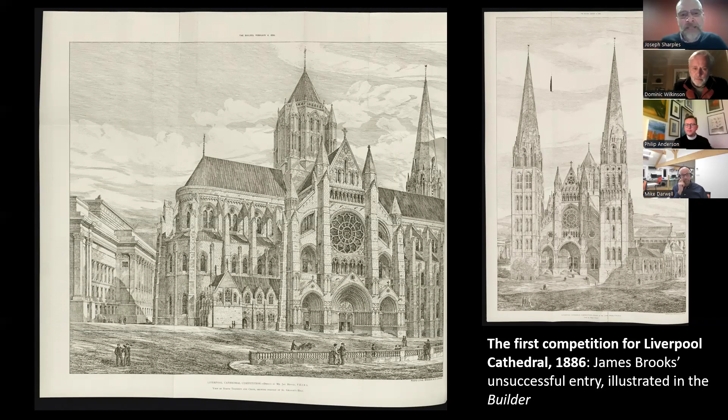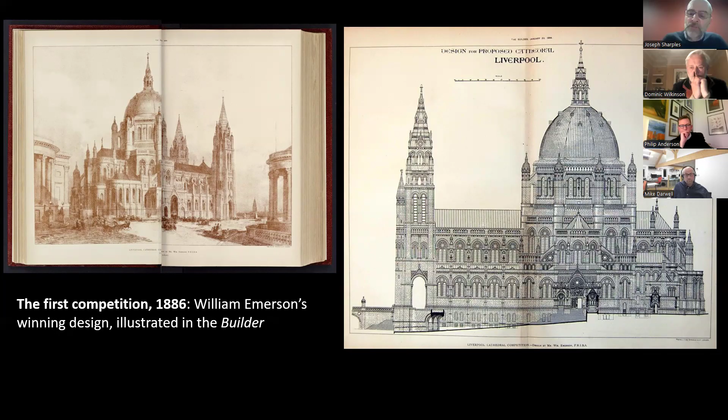There was a strong feeling also that classicism, the architecture derived from ancient Greece and Rome via Renaissance Italy, was a modern style appropriate for building in the 20th century. These two parties, the classicists and the modernists, were in conflict with the Gothicists. So there were exchanges of letters in the press objecting to the idea that the cathedral for Liverpool should be Gothic. So the Gothic requirement was withdrawn, but there was an unspoken belief on the part of competitors that Gothic would probably be favoured above other styles.

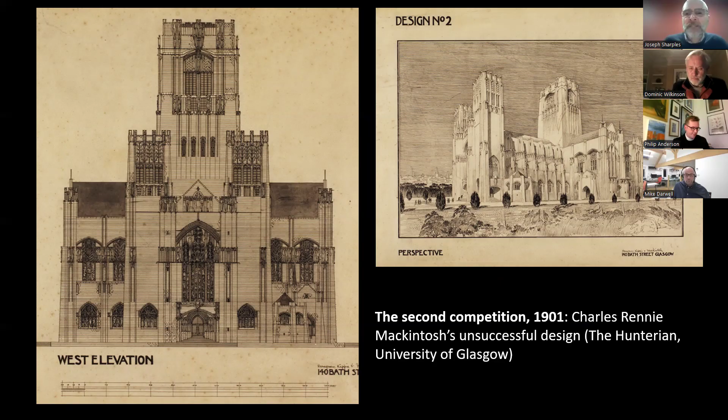There was a styleless design to be executed in concrete by the architect William Lethaby and some associates of his. There was a Byzantine design by the architect Beresford Pite. And there were these designs, which in my present job I'm interested in particularly, by Charles Rennie Mackintosh, the great Glasgow architect of the end of the 19th and beginning of the 20th centuries, in a sort of sinuous Glasgow Art Nouveau style. But none of these was successful.

Another difficulty was that, as well as being young and inexperienced, he was also a Roman Catholic. And in Liverpool, which was a very Protestant diocese, that was perceived as a disadvantage. And so the decision was taken to appoint as co-architect, alongside Giles Gilbert Scott, one of the two assessors for the competition, George Frederick Bodley.

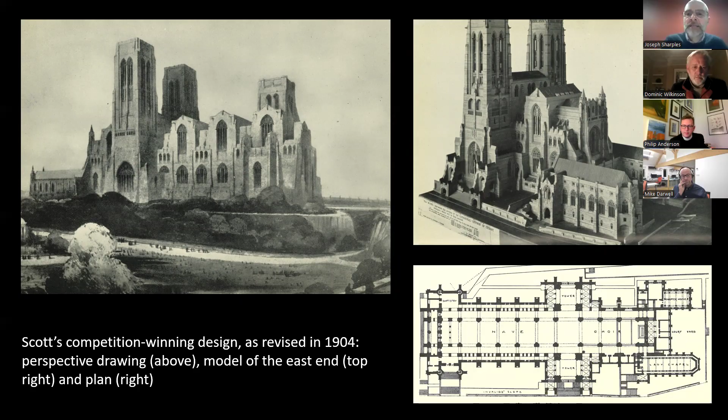Well, the earliest parts of the cathedral to be built were the Lady Chapel and the East End, which are shown in these 2 pictures. They're very different in character from the later phases of the cathedral, much more intricate, elaborate, with more sculptural decoration, more complex tracery in the windows, more numerous offsets to the buttresses that divide up the exterior of the Lady Chapel. And it's been speculated that these features might be due to Bodley's input as co-architect, but that's not at all clear from the documentary evidence. There were certainly struggles, tensions between Bodley and Scott, but it's not clear that Bodley dominated the design to the extent of determining these features.

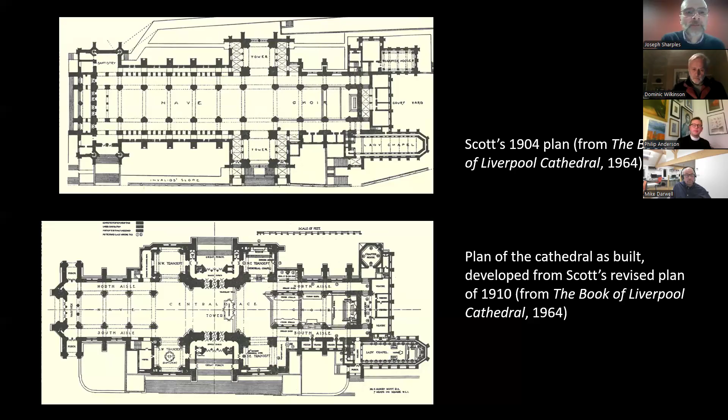It's true of the whole cathedral that although the design was revised in 1910, Scott continued to alter it, to develop it constantly. The art critic of the Liverpool Echo said at one point of Scott that he never saw a full stop without thinking it could be turned into a comma. In other words, he was constantly thinking the design could be changed. It had never reached its final stage. It was always capable of improvement or development.

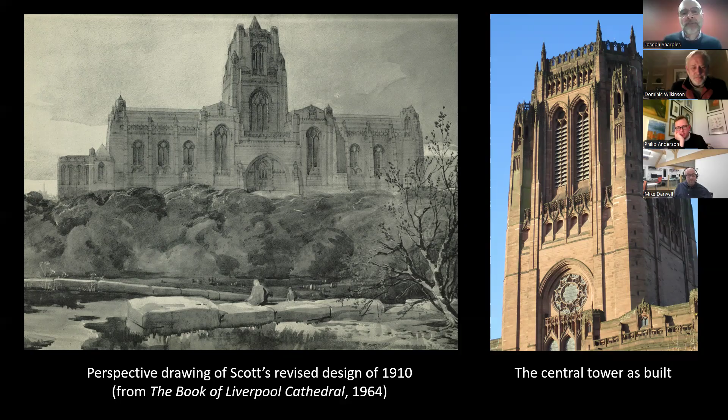A lot of the work carried out in the first phase of construction was predicated on the idea of those two great towers. Now a lot of that masonry was redundant, and other aspects of the design had to be modified to accommodate the changed plan.

This north view of the cathedral shows the symmetry of Scott's revised plan very clearly. But also, if you look closely, it shows the evolving design from east to west, again an illustration of how Scott never saw a full stop, but only a comma. So if you look closely at the design of the windows, it evolves from east to west, becoming progressively simpler. The sculptural decoration, the same. The buttresses in the eastern limb of the church are decorated with sculpture, but not in the west.

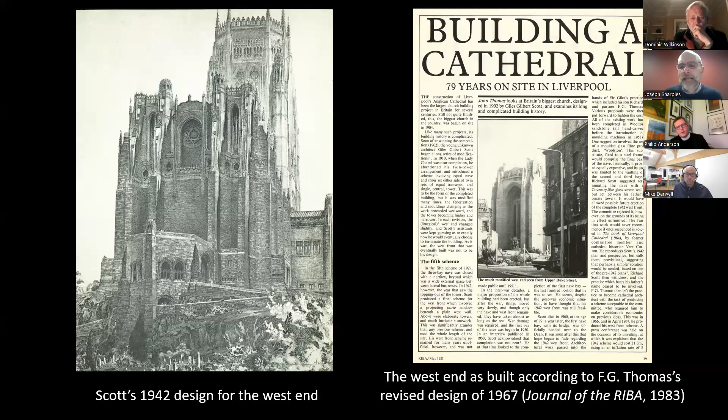I'm just going to end with a couple of images to talk about that setting and perhaps raise some questions that might come up later in the evening. While it was still under construction, the setting of the cathedral was threatened by the inner urban motorway, which blighted so much of central Liverpool in the 1960s and 70s. You can see from these drawings how the motorway would have cut right in front of the cathedral on its south side and then swept round into Upper Parliament Street on its east side. The drawing says colossal scale dominates site, but it's difficult to imagine that this road, had it been built, would not have undermined the dominance of the cathedral.

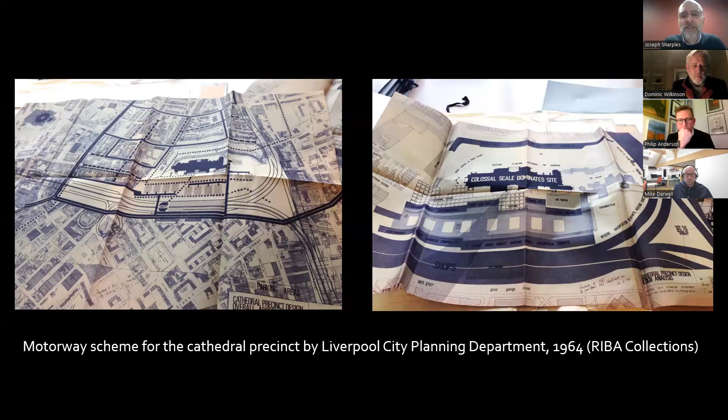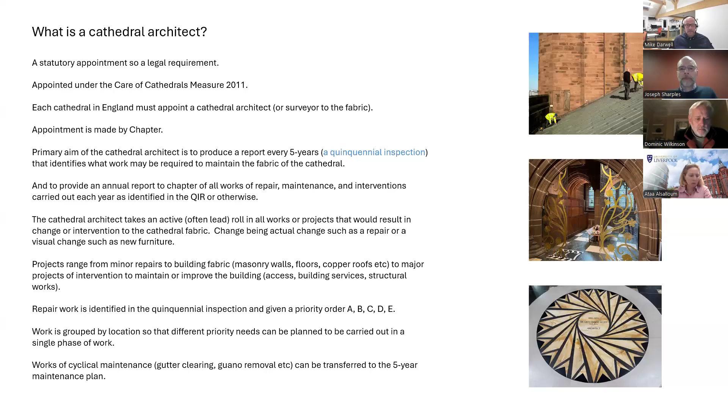I thought I'd mention a little bit about relationships, because this is an important part of the cathedral architect's role. We're not on some hugely high pedestal. I am very much part of a team, and it's a big team at the cathedral, one that works extremely well together.

As I said earlier, the cathedral architect is appointed by chapter, and we provide the annual report. Flowing from that, I also report to the Cathedral's Fabric Advisory Committee, or the FAC. That report comes every quarter, and we make the FAC aware of everything needed by way of repair of fabric or any change on the horizon.

That takes the form of individual project papers, including statements of need, statements of significance, drawings, specifications, as well as information from the multitude of other consultants involved in even the smallest of projects.

The FAC meet quarterly, and sometimes more often with major projects, like the Josephine Butler Chapel I just showed you. The project paper could be called in by the Cathedral Fabric Commission for England, the CFCE, who are party to all of the FAC minutes, so they're very aware of things being considered and can call projects in.

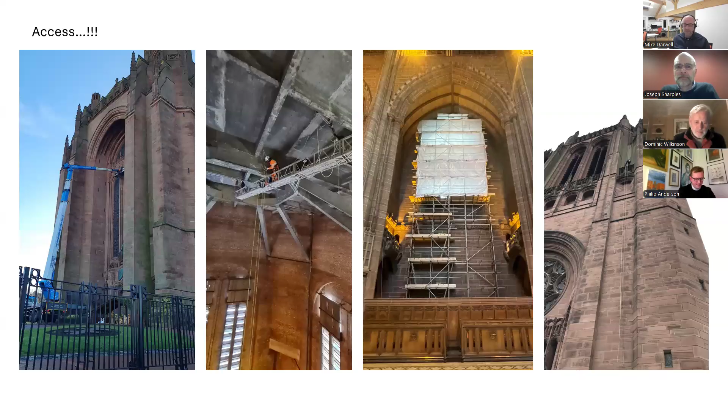At Liverpool, we're lucky. I banged the drum of digital inspection from around early 2020, well, late 2019 I'd say, digital inspection.

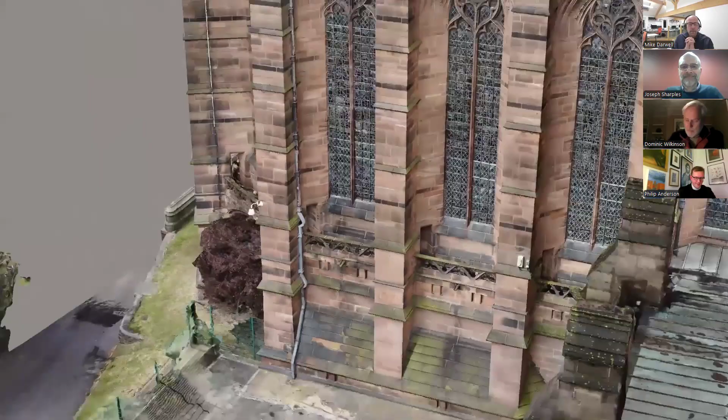So the cathedral committee ran with me on that, and hopefully this video plays. That was a fly on the wall of the windowsill on the Lady Chapel. And we now have this.

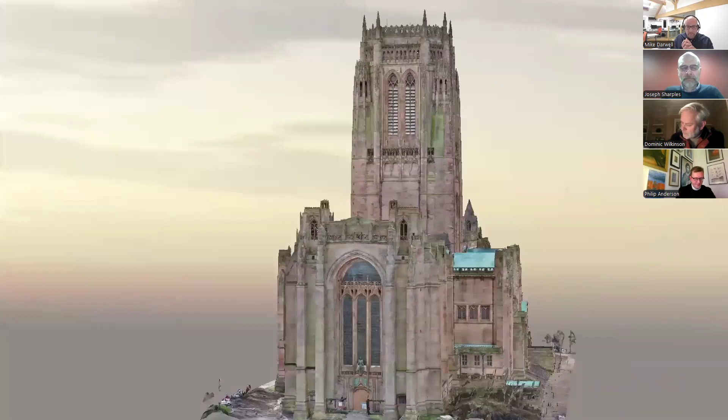So we have a full high resolution digital twin of the cathedral. This is a video playing of a pan around it, but this enabled me to sit pretty much where I am now and carry out a very detailed, albeit visual, inspection of all of the masonry, all of the copper roofs, all of the windows. It took the cathedral architect to a point where, unless you're willing to spend a lot of time on a rope, I could really understand what was going on with the building fabric.

So this is a laser scan to create a building topography, and then it's overlaid with somewhere upwards of 100,000 high resolution SLR photographs captured via drone, when the peregrines allowed us to fly the drone, that is, because that wasn't straightforward. But we managed to do it.

I know digital twins are much more common these days, but I'm going back to early 2020 here, so nearly 5 years ago, and it was just absolutely vital to understanding what was going on with the fabric of the cathedral, so that we could start to get some fact-based discussions about what bits we needed to fix.

I mean, that super high resolution of the high parts - you can see here top of one of the belfry louvered openings where we've got a piece of loose stone that's just sat there. So that was a good example of where I could send the roped access team straight to that point, making efficiency of access and bringing costs down.

So that puts me to my next slide, which I hope it does, without it playing again.

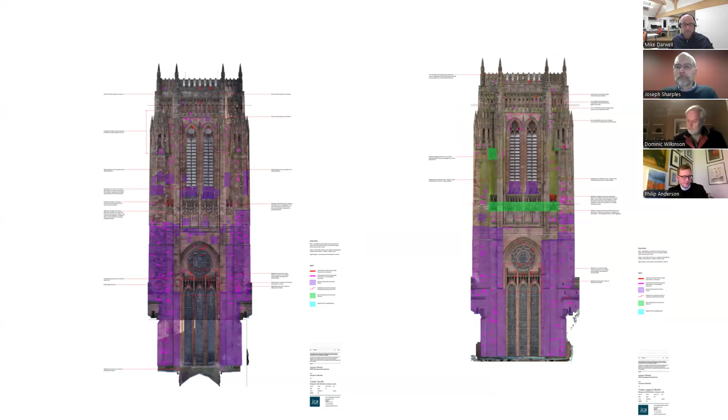That then resulted in a set of rectified photos, ortho photos as we call them, and that's the cover of the 2020 quinquennial. That then allowed me to generate heat maps, as I term them, of the external fabric. Without going into too much detail, the red bits are the bits that are very broken. The magenta bits are sort of less broken, but if you're going to go and fix the red bits, you would fix the magenta bit, and the purple hatches where repointing is needed.

So in all, the cathedral fabric, if we take the tower as an example here, isn't in very bad condition. It's not that old after all. It has been weathered, it's suffering a lot from settlement - it's a new building, and it's a big building, so there's a lot of load going down onto the ground. But what these heat maps could do is create that fact-based conversation about where defects existed, and also enabled us to very quickly communicate across every audience as to how and where we needed to set about repair work.

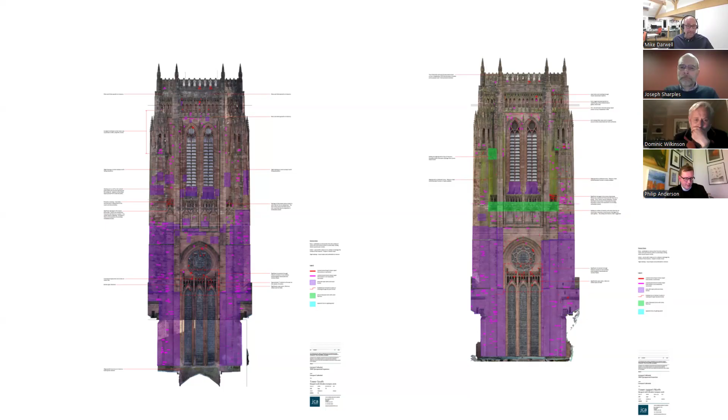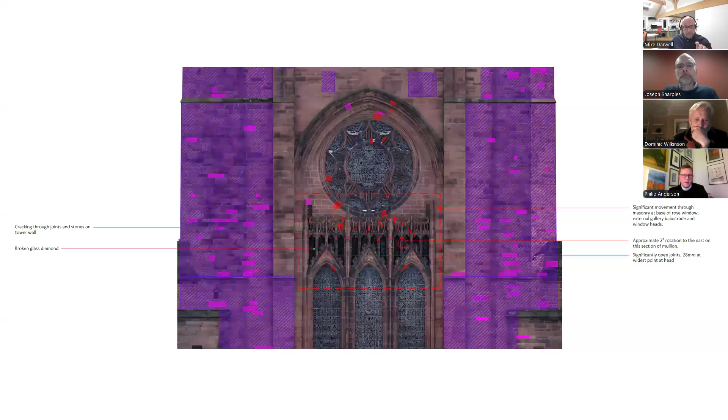This is a close-up of one of the external galleries below the rose window on the north side, I think that is. We can see here, this is one of the bits where we're going to have to go and fix quite quickly, because we've got dipped masonry, relatively wide open joints. We're worried about destabilization of windows, things like that. So we can target that point where we would now go and put a fixed scaffold to actually carry out that repair work.

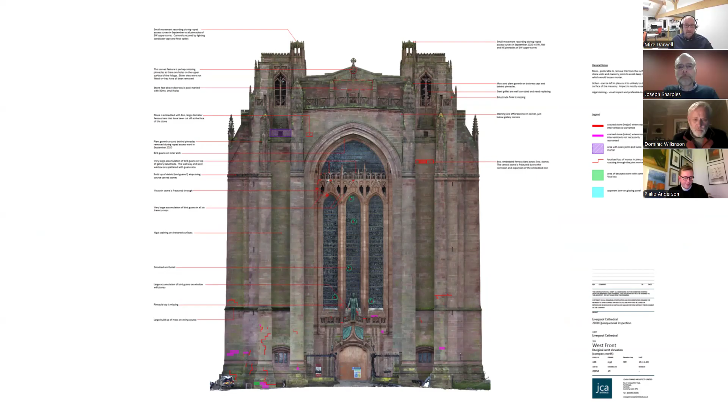That's the west front as is now - later construction, north facing, compass north facing, so it's the sheltered side, and that reflects in the work needed. Less work, a little bit of cracking again from settlement that would happen, but generally we're more comfortable.

What I thought I'd end on is a project that brings all of this together: the well floor. This was one of the first things I was involved in when I started in January 2019 - first day on the job, and we were drilling a hole in the floor to understand the construction. It was quite alarming stuff for me, but we rolled out this project.

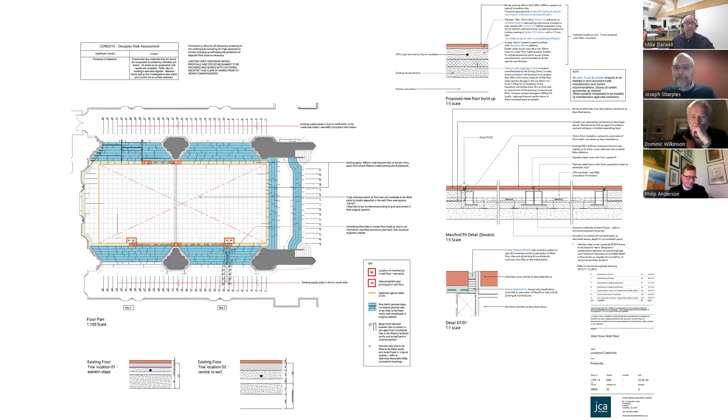We kept the cathedral open during this work. The diamond cutting was carried out at night by a specialist team, opening up the very tight joints in the tile, underneath a full enclosure with dust extraction. We have one of the most important organ instruments in the world in the cathedral, so we worked closely with the organ team to make sure they were happy with what we were doing and that we were controlling the dust enough.

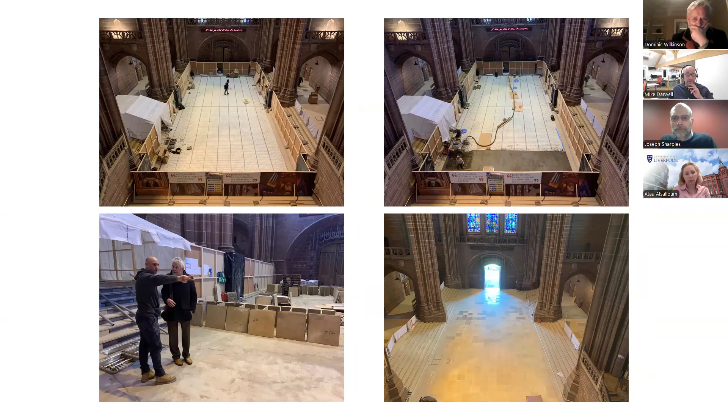So the tiles were cut and lifted - you can see top right, they were labelled. Bottom right, they were moved outside to the west front for an onward journey to the stonemason's yard. Then the underfloor pipework matrix was laid - plastic pipework, very modern construction - with insulating flow screed, and when ready the tiles were brought back in. Bottom left is the contractor and the chair of the FAC discussing the project as we go forward. Bottom right is the project completed, with the tiles all back and reinstated.

The cathedral didn't close, and now the west well floor is future-proofed to be run off an air source heat pump, if we can get that project off the ground - which we're actively working on as we speak. So that is me. I hope that's given you an introduction into the role of the cathedral architect and how we carry that out at Liverpool.

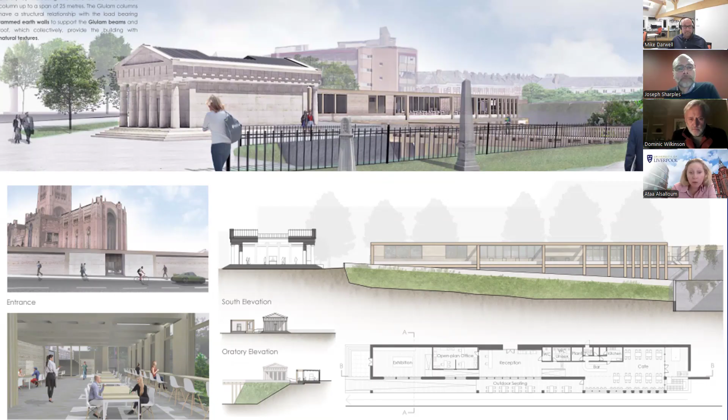You can see here some examples of student work where they explored concepts for a new entrance and a potential commercial space for the cathedral. Later we had the honor of exhibiting their project inside the cathedral. The students were very proud, and visitors admired their creativity in such an iconic setting.

This experience underscored the cathedral's dual role: first, it preserves history, and second, it inspires the future through education and design. In addition, I lead a master program in sustainable heritage management, which has full recognition from the Institute of Historic Building Conservation. We are planning placement with the cathedral, offering students hands-on opportunities to collaborate on meaningful heritage projects.

Now, moving from my personal journey to the cathedral's broader impact, I would like to highlight its role as a living tradition within Liverpool's community life. Before diving in, let's consider a significant milestone: in June this year, the UK ratified UNESCO's 2003 Convention for the Safeguarding of Intangible Cultural Heritage. This convention broadens our understanding of heritage, recognizing it as more than just monumental structures. It highlights living heritage - the rituals, traditions, performing arts, craftsmanship, and collective memories that sustain communities across generations.